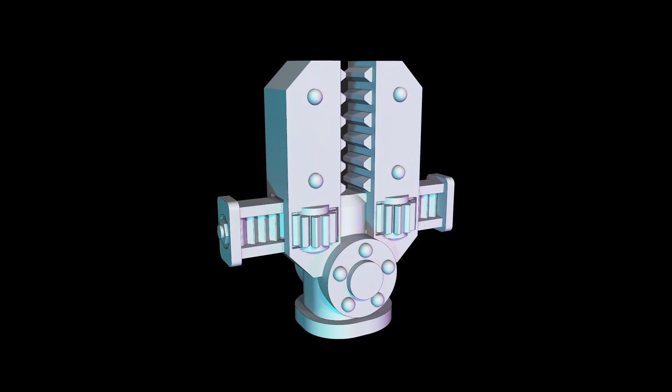So to make this deceivingly simple part, I first draw out a copy of the contact area it will be attaching to. Measuring the arm of UR25 carefully with a set of calipers helps make sure everything will fit and give us a scale to draw from.

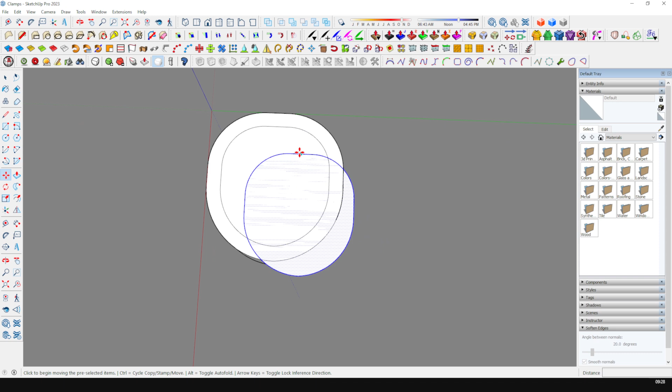Next we can start thinking about blocking in the basic shapes, which will give us the main body of the piece. Now this is where taking a look at some reference material will really help solidify your ideas. This doesn't have to be specifically servitors. In this case, industrial equipment and plant machinery were drawn upon quite a bit.

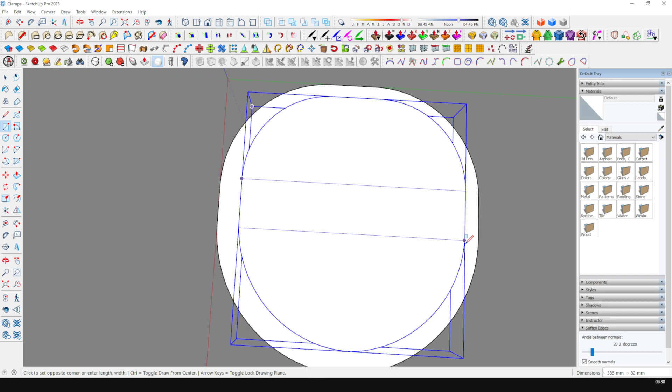Next up, I offset the contact plate edges and extrude up by about 0.7 of a millimeter. Knowing what your printer can resolve along with the distances, recesses and details, which work at 28mm scale, is really important here, as too thin or shallow cuts won't print well or won't end up being defined and can easily be obscured with a layer or two of paint.

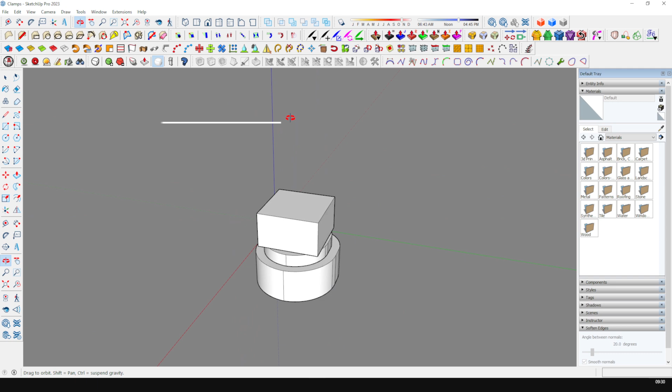A starting rule of thumb that I find helpful is to make sure that the most narrow gap or cut isn't any smaller than 0.3 of a millimeter across, with things like rivets or studs being around 0.65 of a millimeter in diameter. But knowing what will look good, or good enough, comes with practice and a little trial and error.

Next up, I block in the area in which I think the clamp jaws are going to sit, before extruding each individual clamp. At this point, I utilise one of SketchUp's greatest features, components.

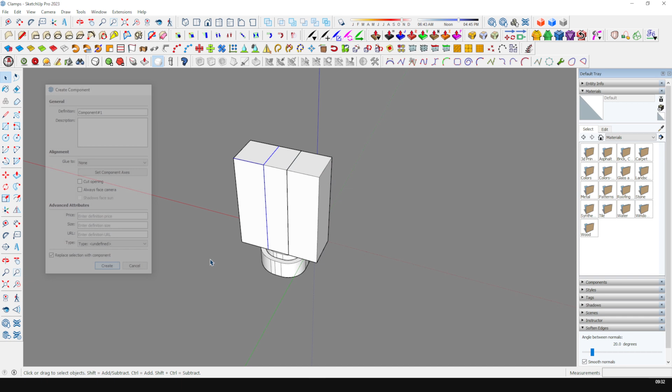A component is essentially a cloned instance of any given object, which retains a connection to the original, so any change made to one is made in the same way to the other. This is great for any project that will have copies of the same item, as it saves on having to edit each one individually. Here I even mirror the copy, so I can just work on one rather than the pair.

With the basic clamps in place, I use the circle tool to create a hub of sorts, sizing and positioning it with the clamps until I'm happy, ensuring there are an appropriate amount of edges to it, so that they can't be seen when printed.

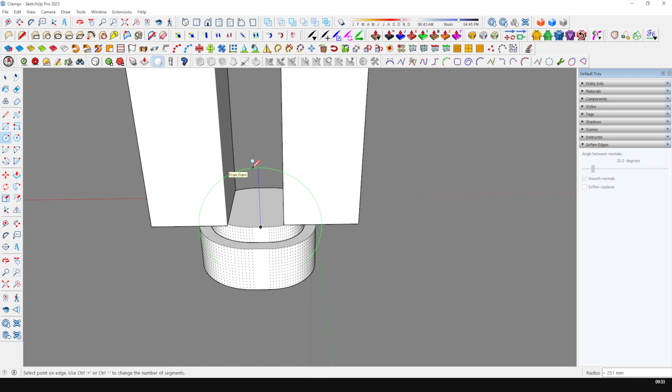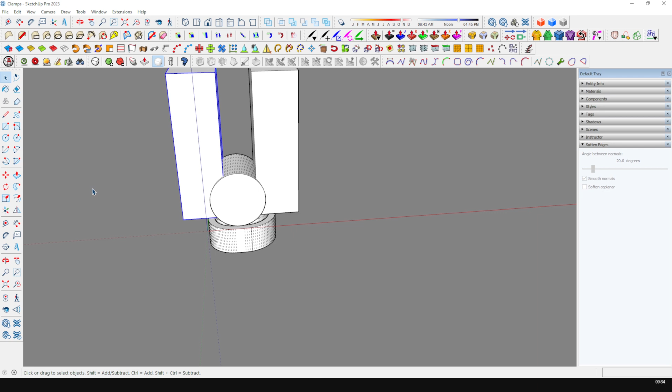My rule of thumb here is 20 sides for small things less than a millimeter or two, 50 sides for larger things up to around 4 or 5 millimeters, and 100 sides or more for anything larger. The reason for not just going ham with 100 or more sides for everything is that the more geometry you have in a model, the larger the file and the slower the software is at handling it. Not so much of an issue with small parts like this, but can be something to consider in larger projects.

Next, I revisit the clamp jaws using a plugin called Round Corner to fillet the edges. Plugins are another SketchUp strength. They're additional third-party tools which are often designed to do something very specific. Many are free, and even the paid ones are more often than not very reasonable considering the amount of use that you can get out of them.

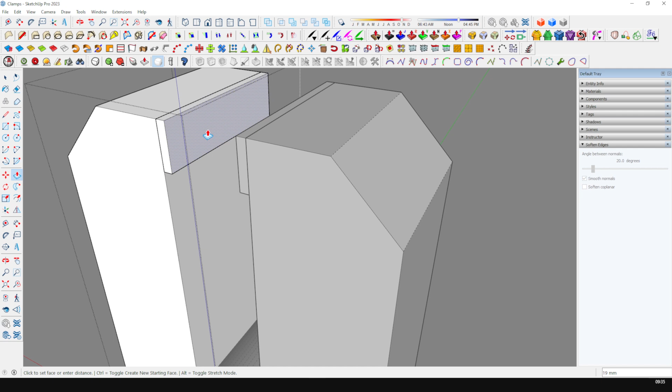After a little adjustment, I use the rectangular drawing tool to extrude out a basic tooth. Again using the Round Corner plugin to fillet the edges, resizing a little, making a component and copying it down the jaw.

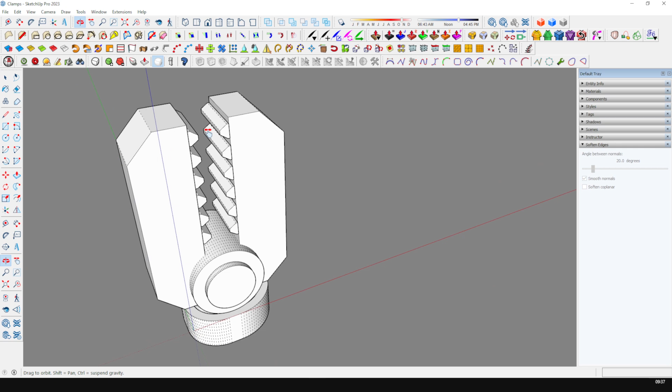Going back to the hub, I offset the edge and extrude out a little detail before copying it to the opposite side. You could also use a mirrored component here, which would save a little time. After a review and some minor adjustments, it's back to the jaws for some detailing, remembering that this piece is going to be quite small, so not overdoing it.

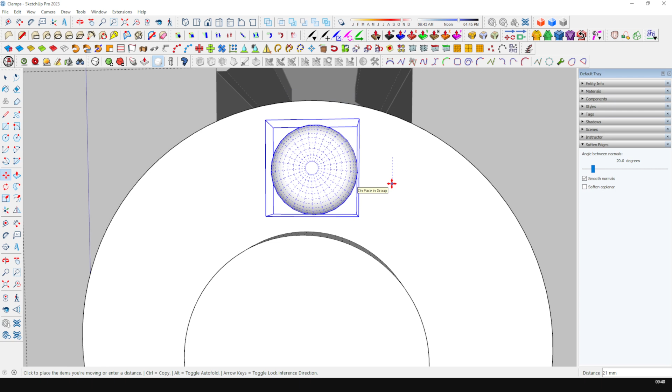A couple of studs extruded from a basic circle with rounded corners does the job for now. Back to the hub again, I want to do something similar, adding studs around the circumference. But there isn't enough space, so offsetting again, I remove some of the inner ring to leave more space for the studs, which I copy around the hub.

Spacing them evenly with the rotate tool, before copying them once again to the opposite side. Now we have something very basic that kind of looks like what we're looking for, but it is very basic. So I make a copy and leave it to the side, leaving the original just in case we want to go back to it. To make the jaws look like they could actually work, I decide to add in a runner connecting them both.

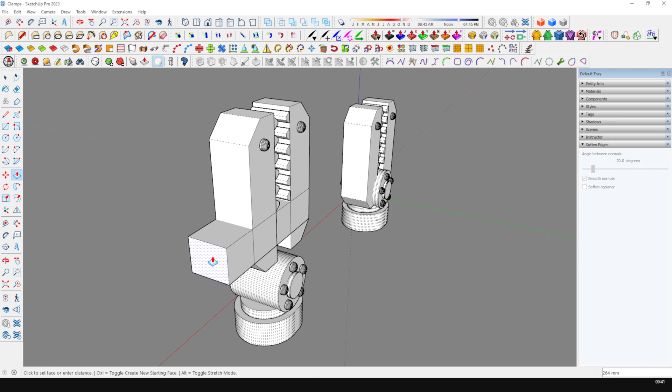Imagining this is what provides the claw with its pretty literal vice-like grip. So using the rectangle tool and the extrude tool, I run a bar through the jaws and out the side of each by some distance, adding caps to each end in the same way, checking periodically that each piece is watertight. This is particularly important when it comes to printing, as any holes can cause errors and failed prints.

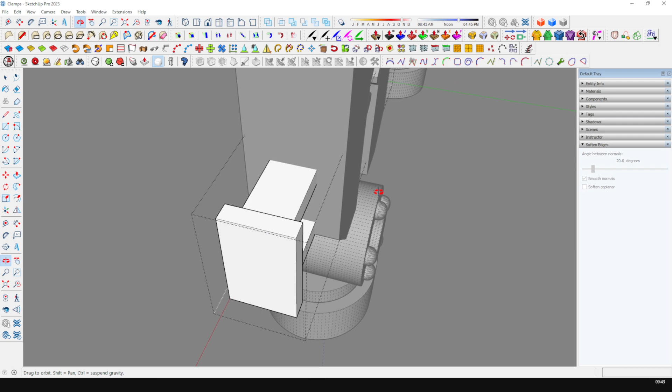Now to add some detail to the bar with some grooves and teeth. I first offset and cut out the bar's centre, before making a tooth in the same way as we did with the jaws, this time copying them without a gap along the full length of the bar's centre, using the resizing tool to make up the difference.

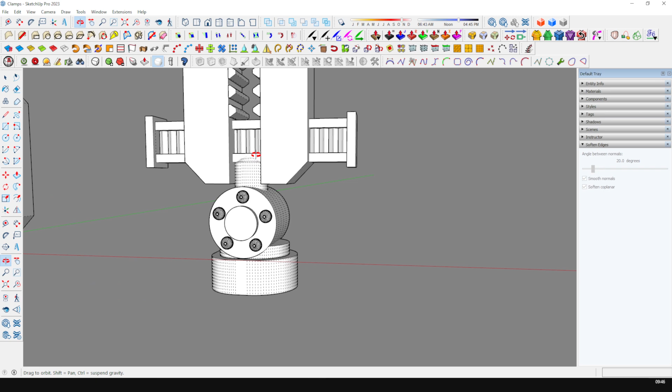It's starting to look a little more believable now, and after another review I add in a section of cylinder connecting the bar to the hub, filleting the end to add a little interest. And just to separate this from the jaws a bit, I offset and cut away a thin boundary between the two, in hopes that once painted, this will help a wash add a little definition.

But taking a step back, I decided to lower the jaws towards the connection plate, which obscures this anyway. But it's the thought that counts, huh?

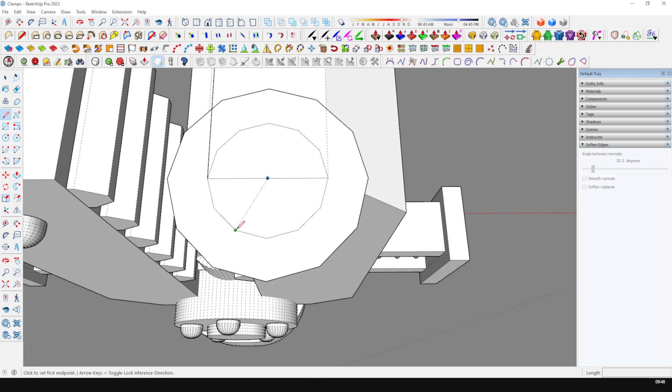It's looking okay, but I still think we can make it look a little more believable. So I decide to add in some visible cogs to the mechanism. Using the circle tool, I select 12 edges, the holy number of the Mechanicus, before using this as a guide to create a 12-toothed cog.

I end up making each tooth a component like before and array it evenly, before extruding the center hub, moving it into its rough position and resizing it to suit. To increase the level of detail, an extension to the hub is added before copying it to the other side, which in turn populates the mirrored component.

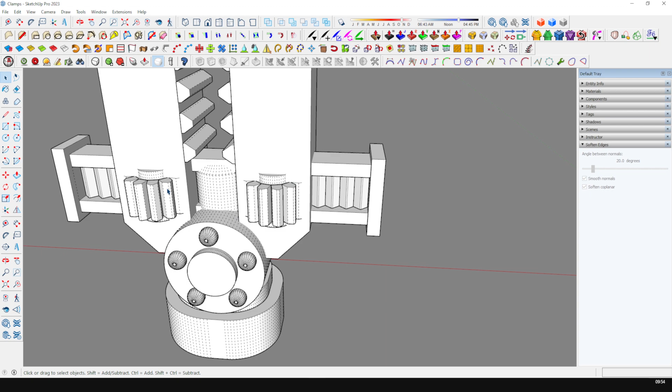At this point, it looks as though the cog is part of the jaw housing, so a thin groove is cut around it just to add a little separation and definition. Hopefully I don't end up covering this up like before.

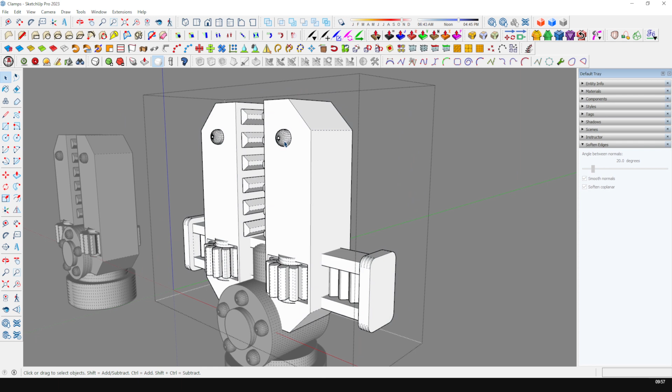Feeling like we're almost there, I still want to add more detail, so I round off the corners of the plates at each end of the toothed bar using the previous plugin, before making some small adjustments to the teeth in the jaws and adding an extra stud. More separation is added between the bar and the jaws for the same reason as previous, before I go back and adjust the size and position of a few other parts.

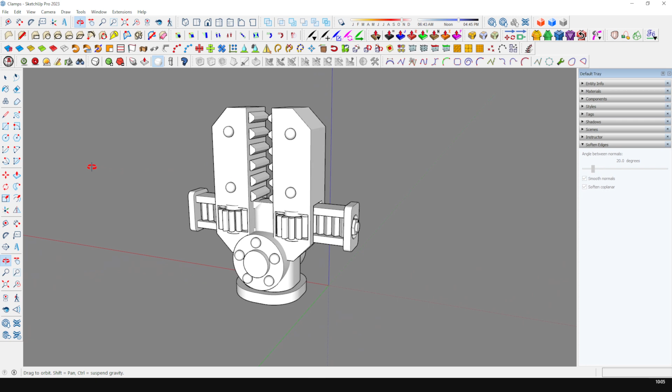But still feeling like it just needs a little more, I use the circle tool again, selecting 6 sides, extruding a nut and a bolt for each end of the bar, recessing them both for added interest and texture, without going over the top with the detail. And after a few final adjustments, that's about it.

The part is exported as an STL, supported, scaled and sliced in Lychee Slicer before being printed. Now Lychee Slicer is a piece of software that cuts up the files into a format that the 3D printer can understand. I won't go into details about it here, but I did make a few copies in the slicer, each at slightly different scales.

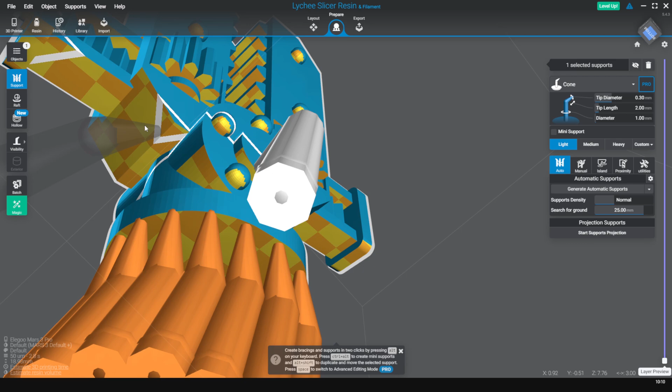Once printed, this gives you options, meaning you can offer them up to the actual mini and pick the size you prefer, without having to adjust and reprint if it's just a little off in scale.

If you're looking for more information on where to start with 3D printing, I'd highly recommend checking the videos made by Ross over at Fauxhammer, as his videos explaining the fundamentals of resin printing specifically for mini wargaming are the best about and far better explained than I'm capable of.

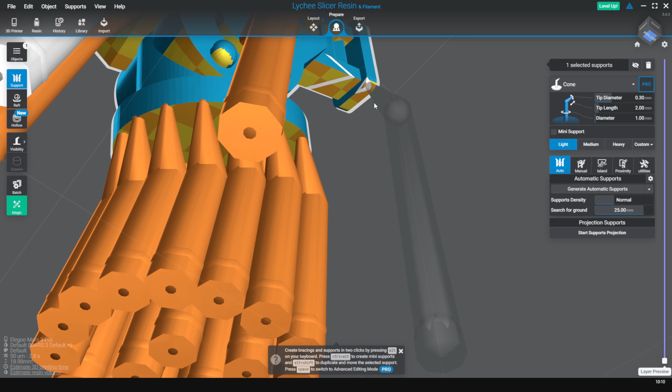So after a quick print, here we are. UR25 has an extra grippy hand, and although he's not as tall as the rest, I think he'll look great marching alongside some bigger stompy robots.

As always, I hope this has been helpful, and hopefully not too dry. I'd be really interested to hear your thoughts. Does 3D printing in the mini hobby space interest you? Do you think you'll have a go at making your own digital parts for 3D printing?

Or do you already? Is this kind of video something that you'd like to see more of? The numbers are saying no, stick to painting videos. But creating custom parts is such an integral part of my hobby that I really enjoy sharing. So I'd love to make more videos like this, or find a more engaging way to share it. Maybe I just need to shoehorn them into a few more painting videos.